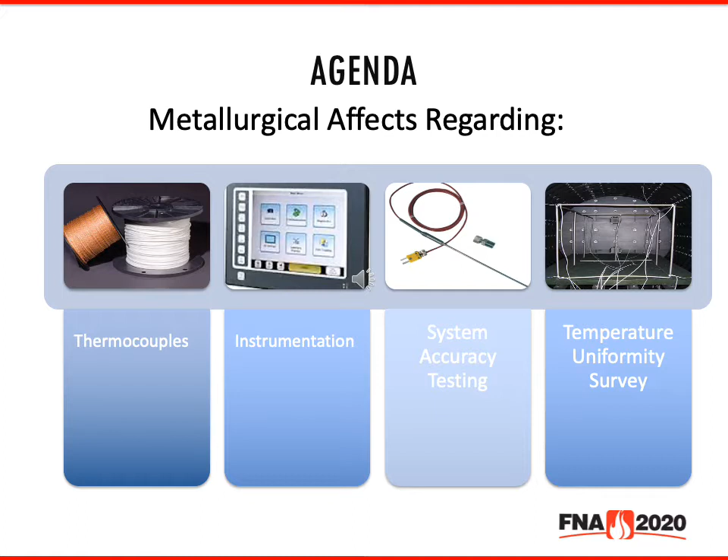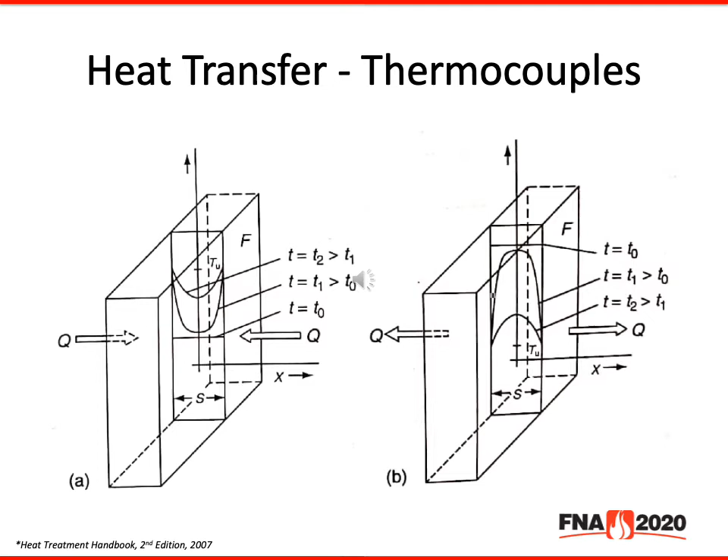We will start with thermocouples. Microstructure changes due to heat treating is dependent on, among other things, heat transfer, whether direct or indirect, and its subsequent cooling. Believe it or not, the subject of heat transfer can get quite involved when you start diving into the technical side. This will include plenty of formulas, including the first law of thermodynamics, which will explain the non-stationary temperature fields developed when heating and cooling over time. For now, we will not take a deep dive into this. The point being that heat transfer is an important part of any heat treating process.

Some industry specifications require that parts be held at temperature for, say, 30 minutes per half inch of material thickness. This is a consequence of heat transfer. If a material is not held at temperature long enough, the product will not reach the desired temperature throughout and, therefore, will not have homogeneous properties throughout.

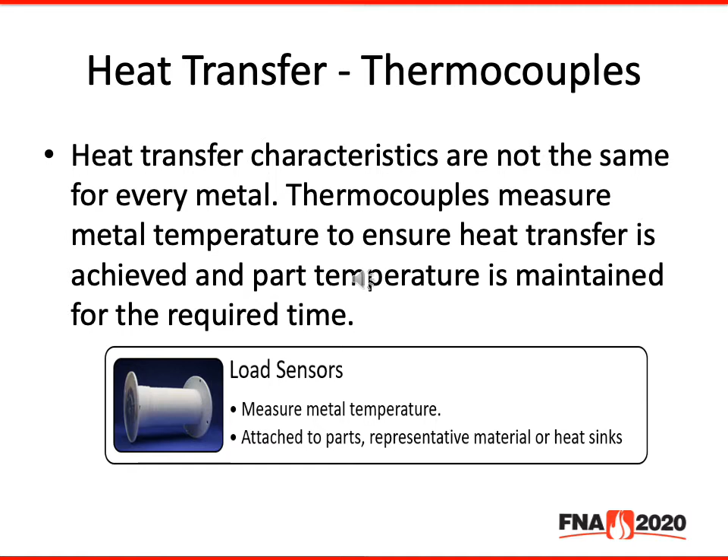Product temperature is measured using thermocouples, which is covered extensively in AMS 2750. AMS 2750F identifies 10 different thermocouple types, 6 base metal and 4 noble metal. Those are then split into two categories, expendable and non-expendable. Selection of thermocouple types will depend on what atmosphere and temperatures the sensor will be exposed to.

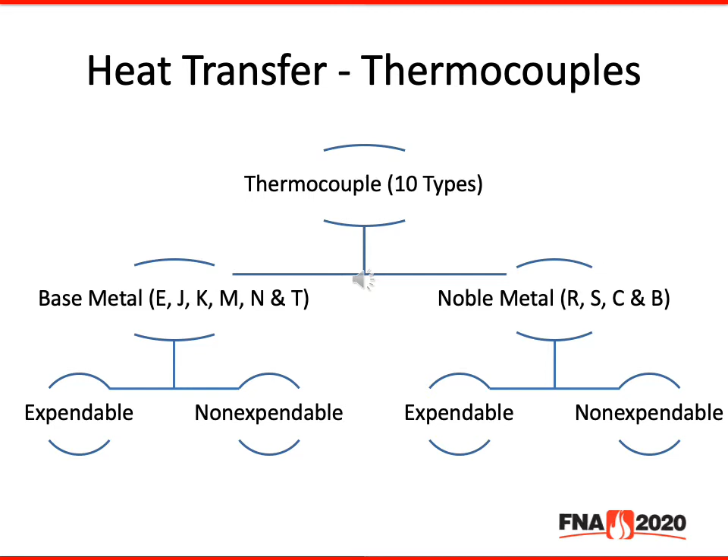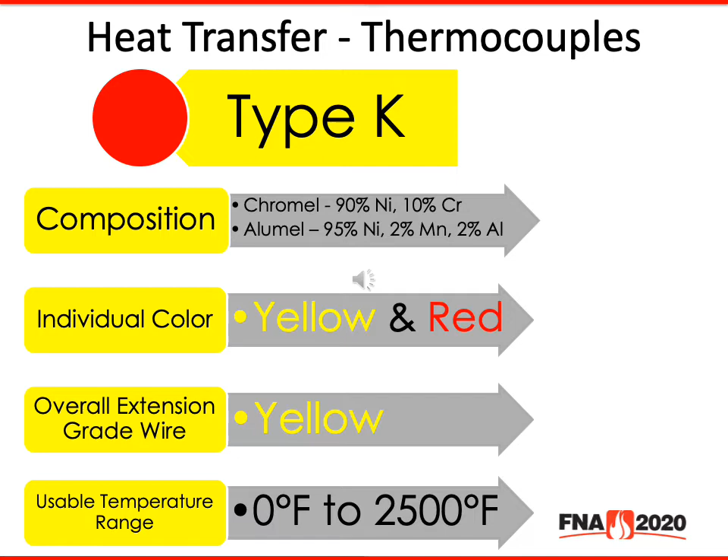Let's look at some quick examples of this. One of the most common thermocouple types used is type K. Its composition is twofold. One side is chromel, the other side is alumel. Individual colors is yellow and red. Overall extension grade wire is yellow. Usable temperature range is 0 to 2500.

As with any thermocouple, type K thermocouples have their advantages and restrictions. Some advantages, they're suitable for oxidizing atmospheres. In higher temperature ranges, they provide a more mechanically and thermally rugged unit than platinum rhodium platinum, and have a longer life than iron constantan. Some restrictions, they are especially vulnerable to reducing atmospheres, requiring substantial protection when used.

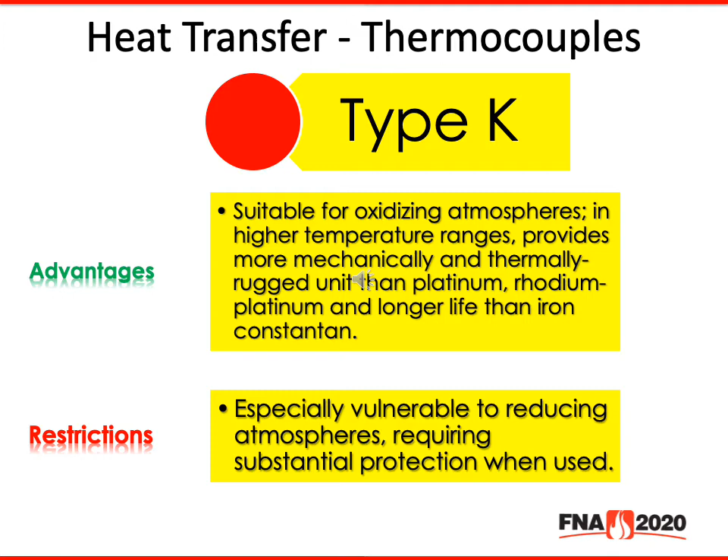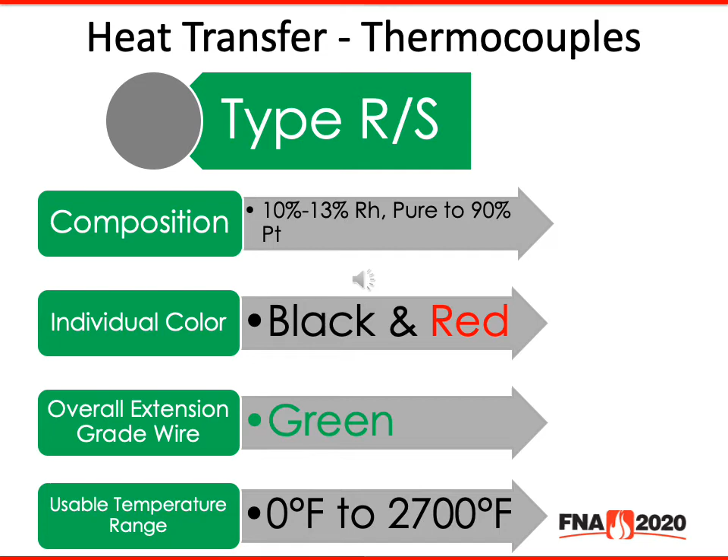Another common type is type R or S. Composition is 10 to 13% rhodium and then pure to 90% platinum. Individual colors black and red. Overall extension grade wire is green. Usable temperature range is 0 to 2700 degrees. The advantages of type R and S is they're usable in oxidizing atmospheres, provides a higher usable range than type K. They're frequently more practical than non-contact pyrometers and has a high conformity to published calibration data. Some restrictions is they're easily contaminated in other than oxidizing atmospheres.

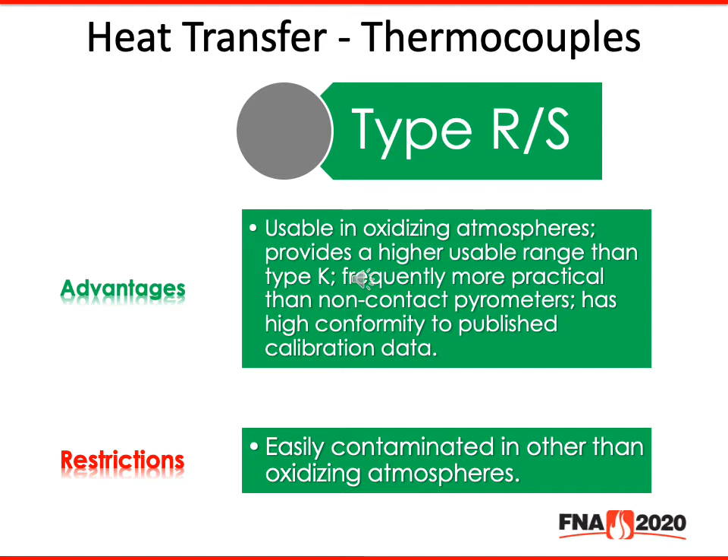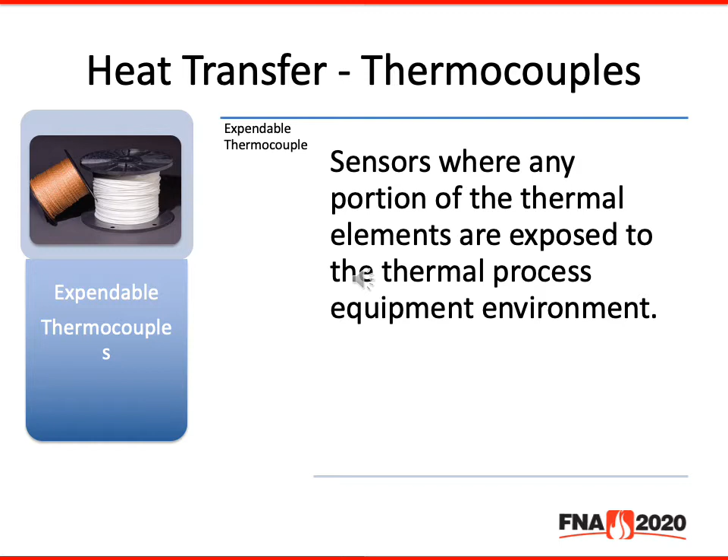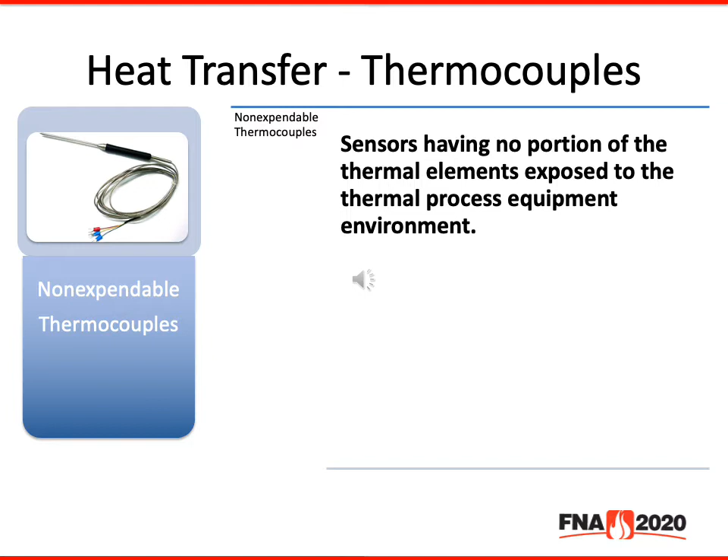Now we'll look at some definitions. An expendable thermocouple is a sensor where any portion of the thermal elements are exposed to the thermal process equipment environment. This is a change from revision E. A non-expendable thermocouple is a sensor having no portion of the thermal elements exposed to the thermal processing equipment environment. Typically, exposed thermal elements may create a more sensitive thermocouple, but will also expose the hot junction to the environment, as shown in this picture.

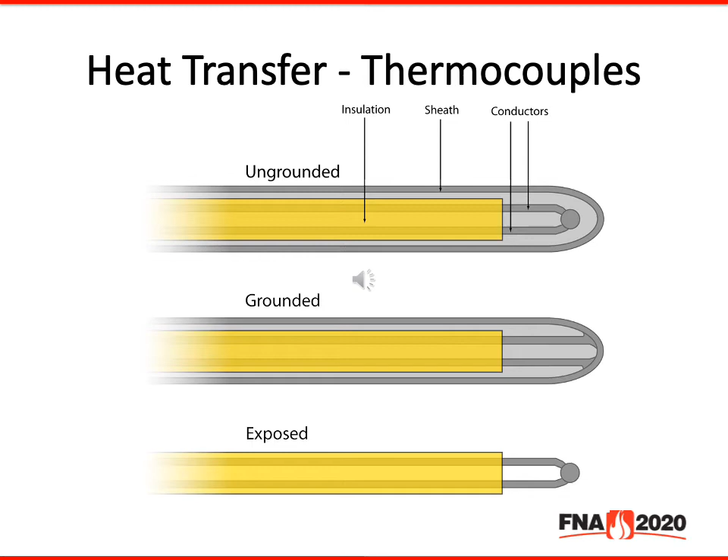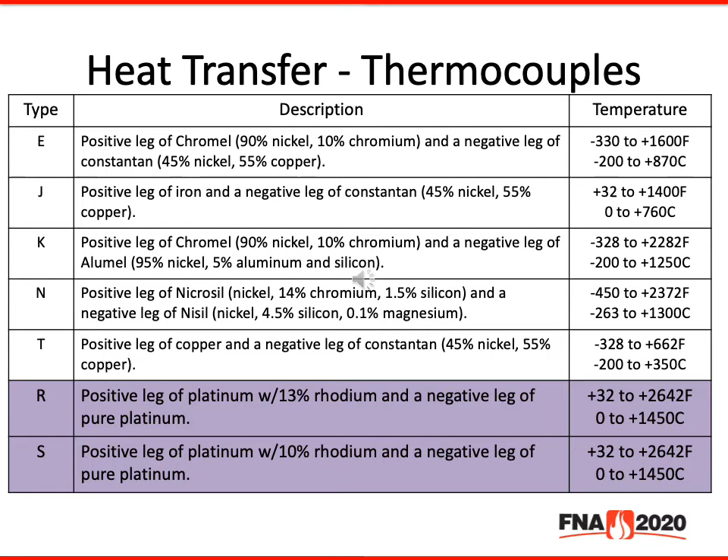The limitations for thermocouple use are based on the fact that thermocouples degrade over time when cycled up and down in temperature. Atmosphere also affects the degradation of thermocouples. If the thermocouple degrades enough, it loses the ability to measure part temperature accurately.

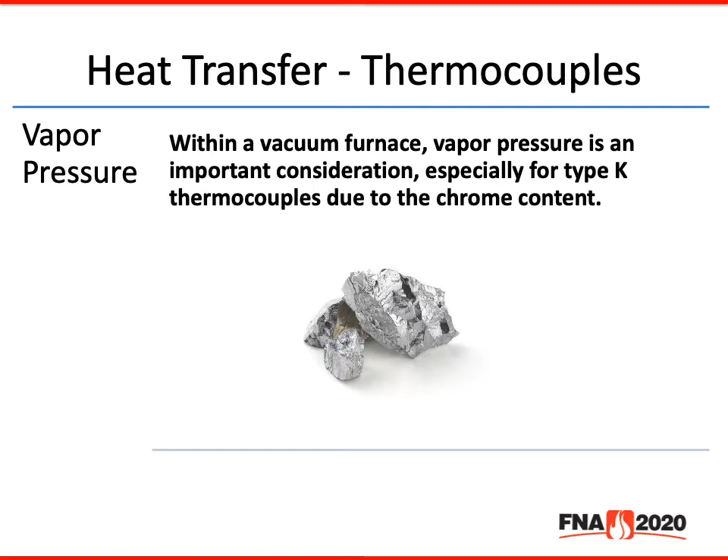If a thermocouple is not reading the correct temperature, a process time may be started long before the part temperature actually reaches the desired point. This would potentially cause the properties of the material to be non-homogeneous throughout. It would be difficult to detect this issue with hardness testing alone. A more destructive form of hardness testing would then be needed.

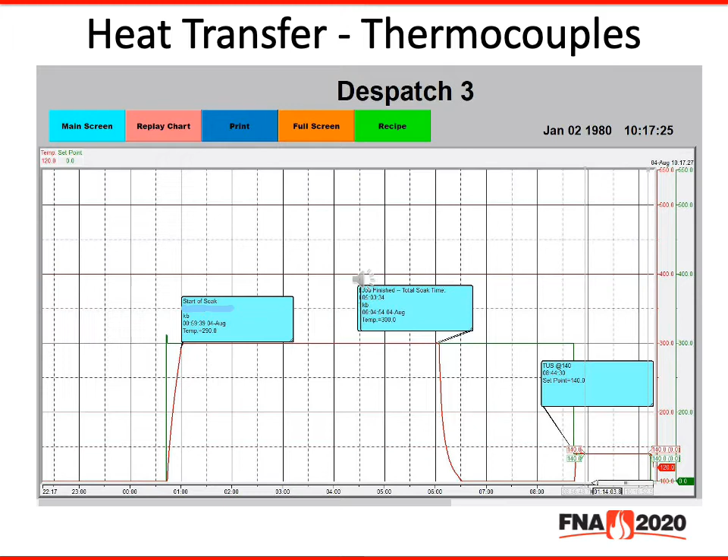We'll now take a look at temperature uniformity surveys' effect on metallurgy. Temperature uniformity surveys, in my opinion, is the portion of AMS 2750 that will have the most dramatic effect on product process in a furnace. Let's begin by talking about what a temperature uniformity survey is.

In paragraph 2.2.76, it talks about the temperature variation, which is the temperature variation within the qualified work zone with respect to set point temperature. Temperature uniformity survey test is an assessment of the temperature variation within the qualified work zone of thermal processing equipment prior to and after stabilization.

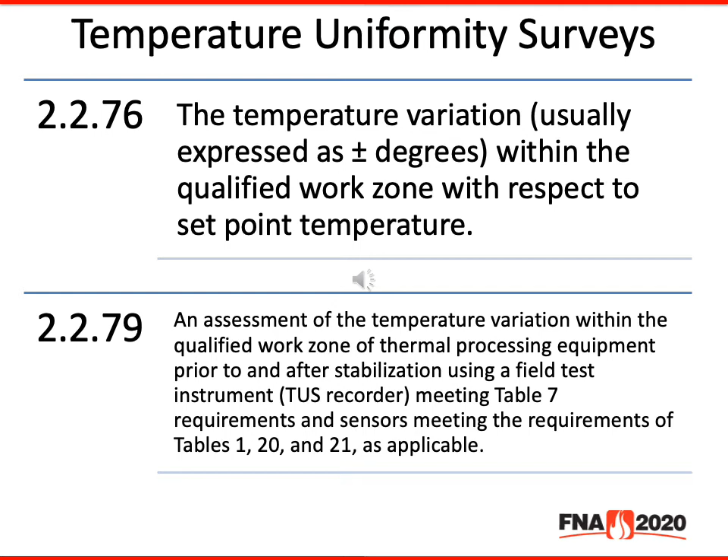Another important distinction to understand with temperature uniformity surveys is a control zone versus a qualified work zone. A control zone is a portion of the qualified working zone in thermal processing equipment having a separate sensor, instrument, and heating or cooling system to control its temperature.

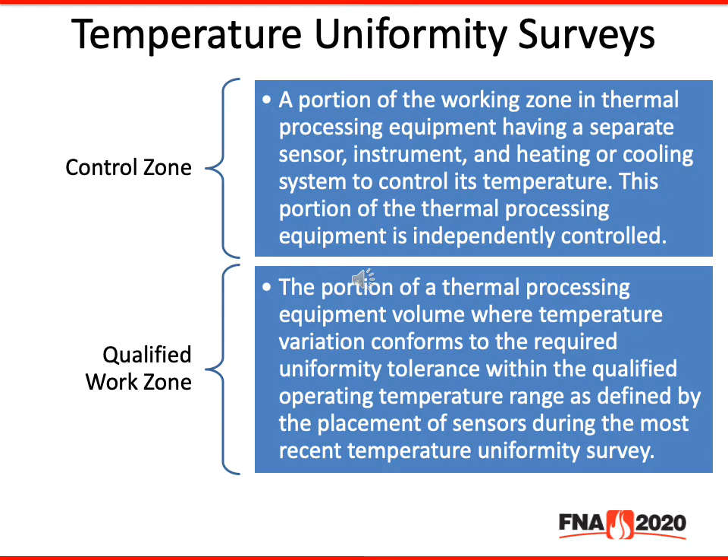A qualified work zone is the portion of thermal processing equipment volume where temperature variation conforms to the required uniformity tolerance within the qualified operating temperature range, as defined by the placement of sensors during the most recent temperature uniformity survey. As you can see, this is an example of a control zone versus a qualified work zone.

The control zone is in the circular red. The qualified work zone is the square.

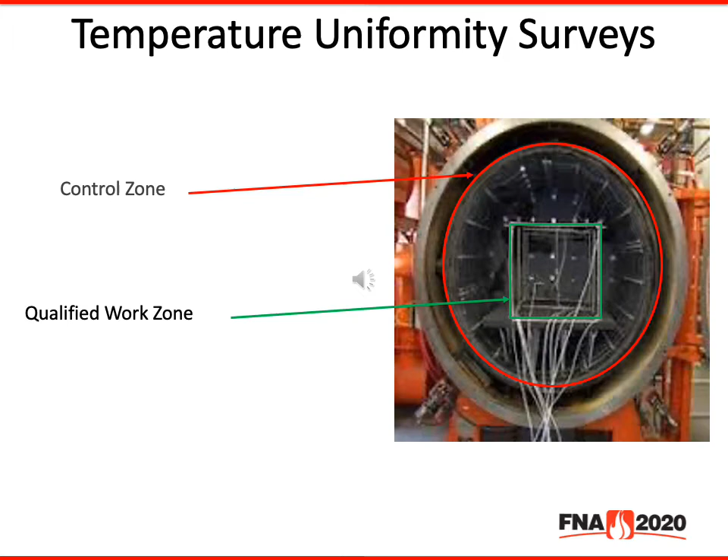The temperature uniformity survey measures the temperature variation within the qualified work zone, which is in the control zone or control zones. It also may be used to establish the hottest and coldest locations if that is pertinent to your process, in other words, type A or C instrumentation.

It also establishes any thermal inertia is within acceptable limits. Thermal inertia could also be called overshoot. This will include ramp rates, PID settings, trim settings, etc.

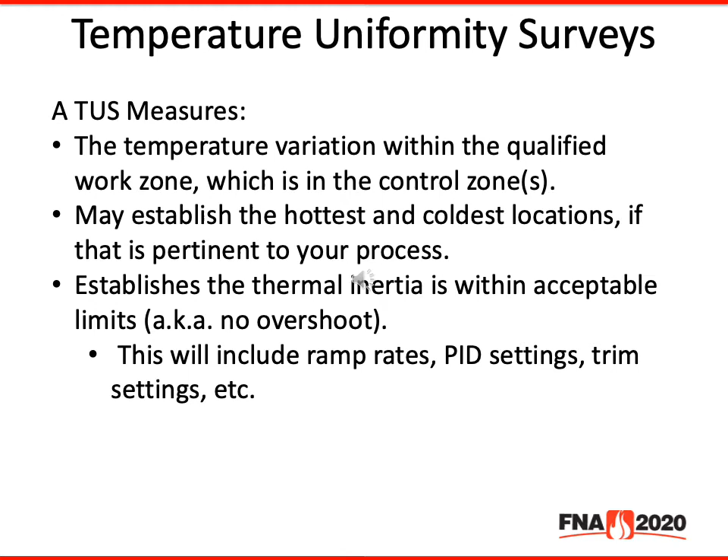To understand the effect of temperature uniformity surveys on metallurgy, we're going to use two examples, one in diffusion brazing and another in aluminum heat treating. We will start with diffusion brazing.

Diffusion brazing is used to prevent remelt of the braze joint when the product is exposed to higher temperatures in service. It's typically held just below the liquidus range.

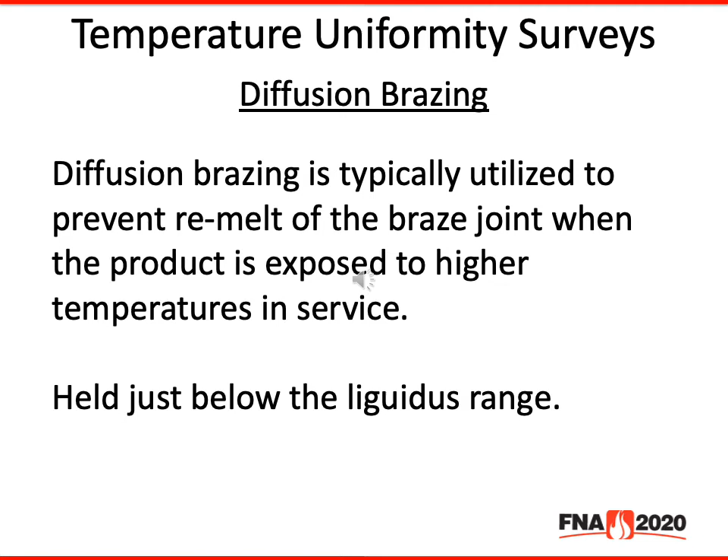There are two braze cycles shown here. On the left is a standard braze cycle. On the right is a diffusion braze cycle. You can see that the temperature is held after the braze at 1950, whereas the standard braze on the left, it is not.

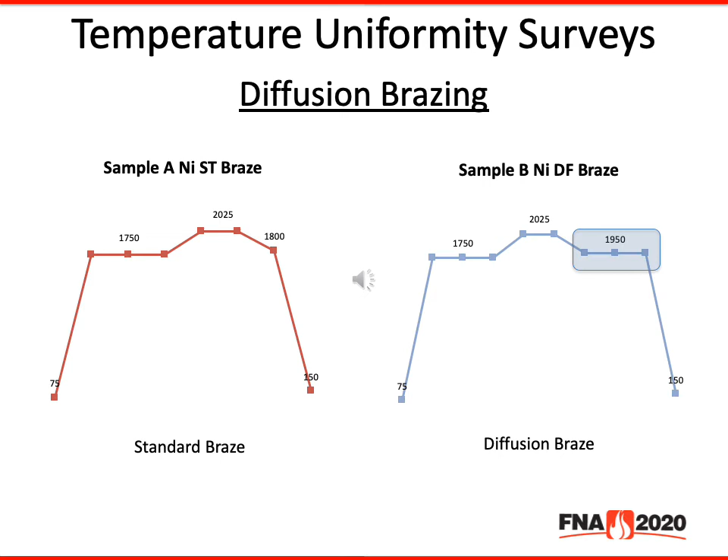In this case, this 1950 hold is what makes it a diffusion braze cycle. Once the high temperature braze cycle is completed, the part should be vacuum cooled to 1950 and held for 40 minutes. It should have a plus or minus 10 tolerance.

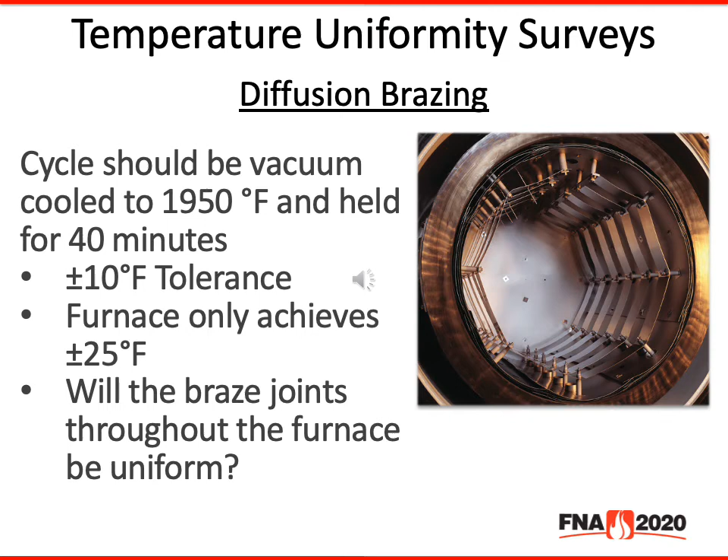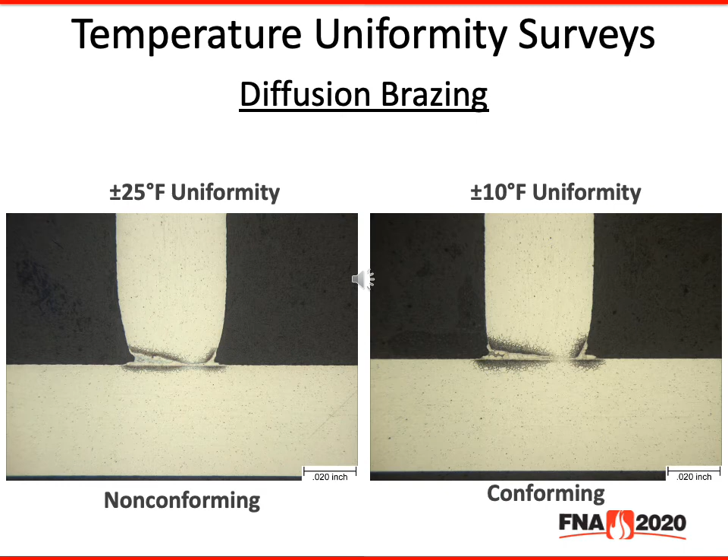Now let's take a look at aluminum heat treating as an example. In general, aluminum is classified as two different types: heat treatable, precipitation hardenable, and non-heat treatable. Following this classification, wrought and cast aluminum alloys are further classified by temper codes to indicate condition.

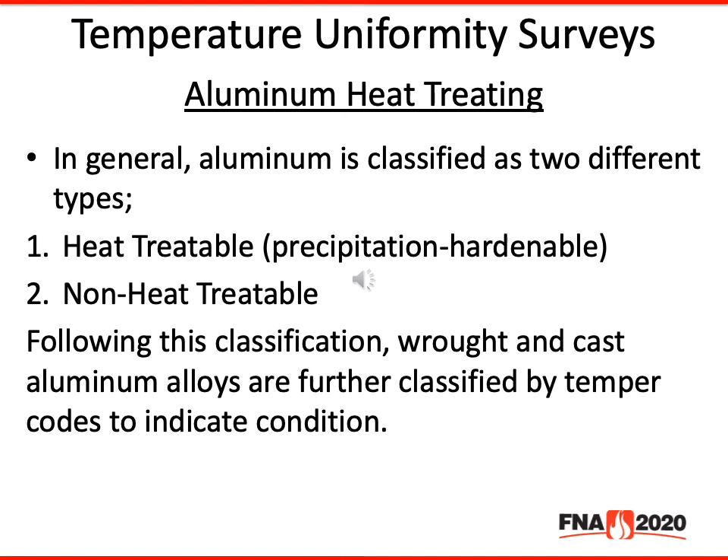By definition, heat-treatable aluminum alloys are those that can be strengthened by a suitable thermal process for that particular material. Solubility of the alloy elements are directly related to temperature, although alloy element weight percent is also a critical factor.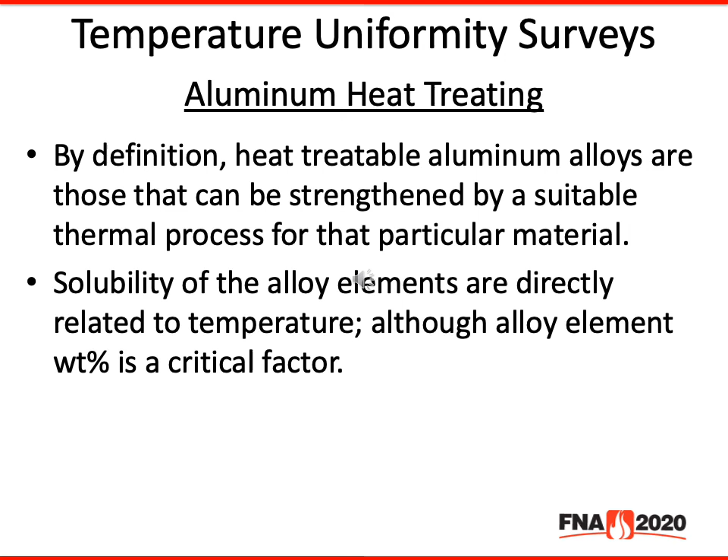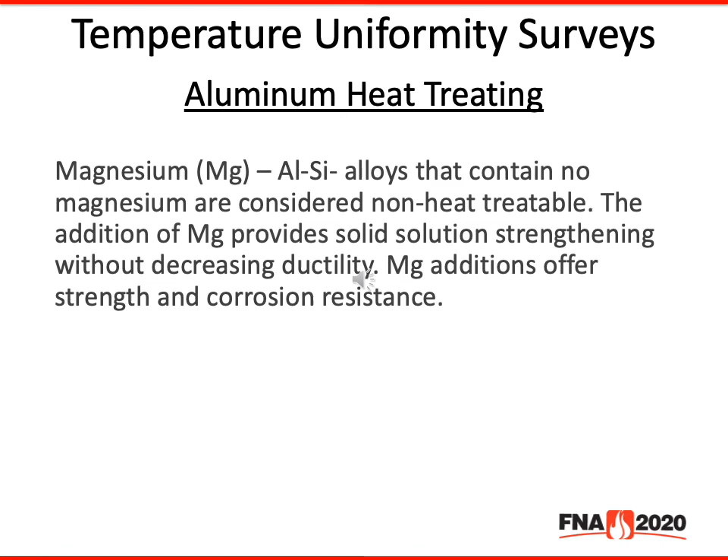Alloys that contain no magnesium are considered non-heat treatable. The addition of magnesium provides solid solution strengthening without decreasing ductility. Magnesium additions offer strength and corrosion resistance.

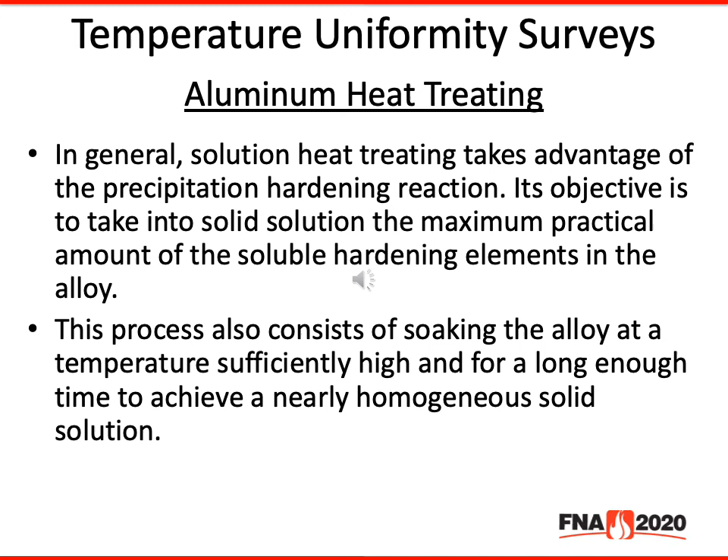In general, solution heat treating takes advantage of the precipitation hardening reaction. Its objective is to take into solid solution the maximum practical amount of the soluble hardening elements in the alloy. This process also consists of soaking the alloy at a temperature sufficiently high and for a long enough time to achieve a nearly homogeneous solid solution.

To obtain the maximum concentration of magnesium and silicon, the solution temperature must be as close as possible to the eutectic temperature, ideally about 10 to 15 degrees below the eutectic temperature.

Control of temperature is critical in aluminum heat treating. If the melting point is exceeded, incipient melting, which is localized melting at the grain boundary, may occur and mechanical properties may suffer. This condition is only detectable by metallographic examination and is irreversible.

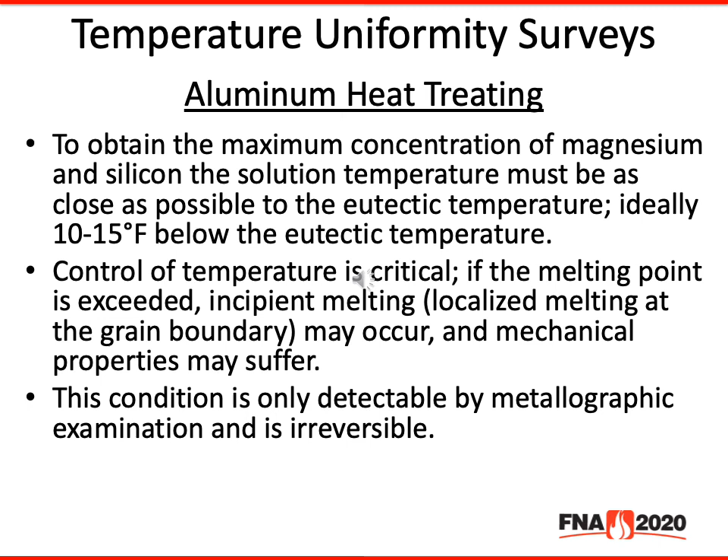This is why furnaces used for aluminum solution heat treating are typically required to have a temperature uniformity of plus or minus 10 or better.

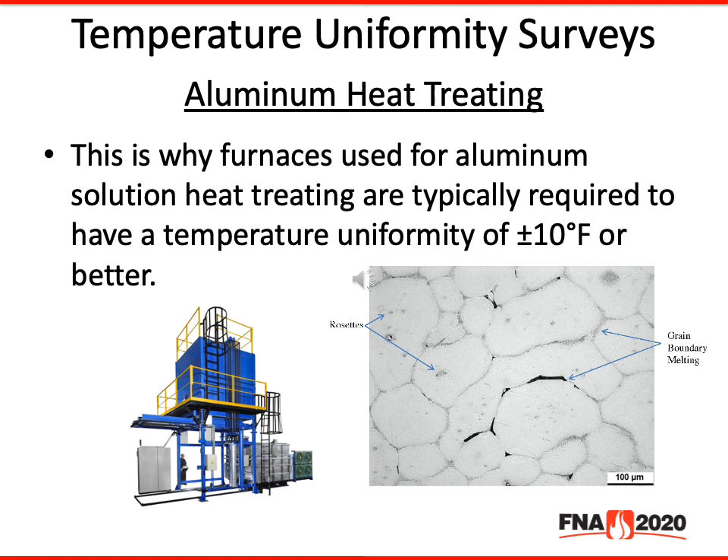In conclusion, the question, does it really have any effect on the specific product that I heat treat, will come up from time to time, and hopefully those that perform pyrometry can explain this.

While we can explain in general how aspects of pyrometry may affect the microstructure of products, we cannot use that as justification to deviate from requirements.

One may not feel that 0.5 degrees above the tolerance during an instrument calibration has any detrimental effect on product. It is nonetheless non-conforming and must be addressed.

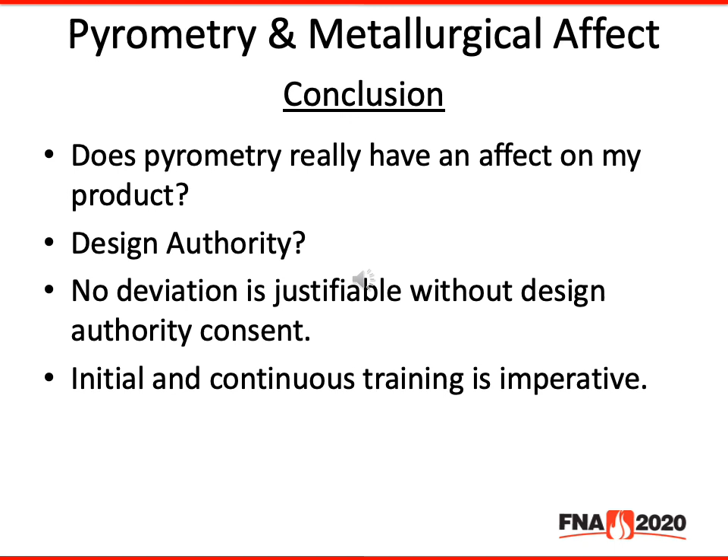While considering the metallurgical effect of the different aspects of pyrometry, it is a useful tool to understand pyrometry from a cause and effect point of view. It is incumbent on the processor to ensure conformance to all aspects of pyrometry. This can only come from continuous training and experience.